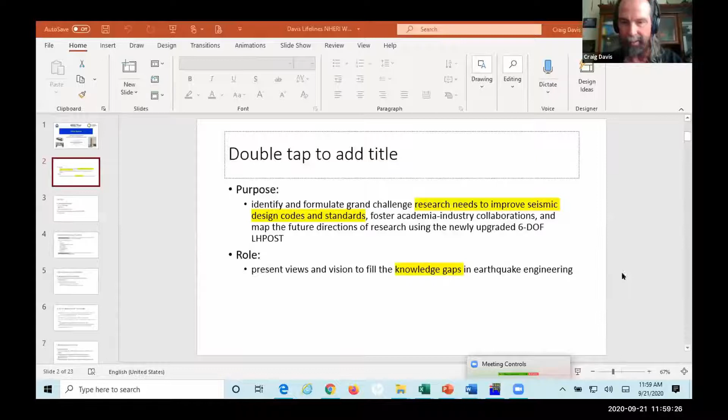Excuse me, Craig, excuse me to interrupt you. In case you are showing a slide right now, we don't see it. Oh, no. Are you still on the very first slide? No, we don't see any slide. Did you double click on share screen? I did. I'm sorry, I should have asked. Okay, I think it's coming. All right. Well, you've missed half my presentation. That's all right. Not quite that. You may want to put it in presentation mode, Craig. I'm so sorry. Yeah, it's tricky. I apologize for that. But now it's back out. We don't see it again. Let's see, try to do it.

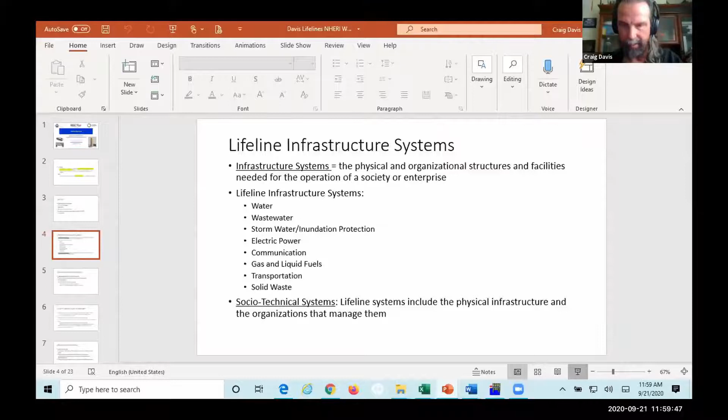And if you just click the presentation mode now. Yeah, the problem was my, there we go. Yeah, there you go. Good. Yeah, great. The internet stuff was in the way. Okay.

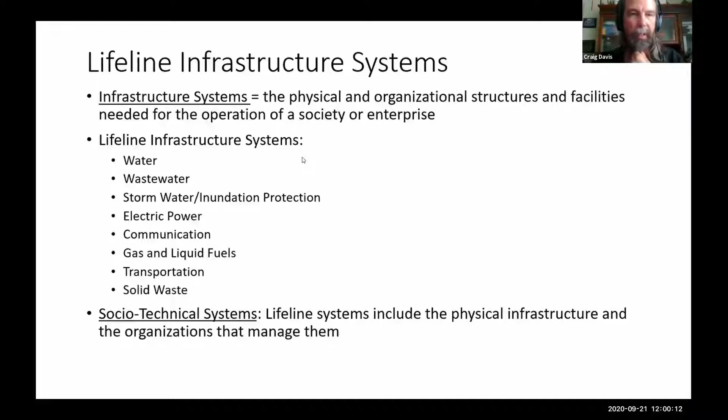So most of that verbal stuff had some language to go with it that you could look at on your own if you wanted to understand better. So what I was leaving with were these. So I just explained what Lifeline Systems are here, and I have them listed in the socio-technical systems. And I was going over this slide here, where there are numerous interlinked specialized components. They're interdependent, and they consist of a variety of subsystems.

So even though I was explaining the components, like dams or certain structural systems like bridges or buildings, in my language that I'll be describing here they are listed as components. There are also these components that make up subsystems. So as an example, if you have a water system, subsystems will be the supply, treatment, transmission, and distribution. Again, all of which could contain these components, right?

So in a water system, a tank or reservoir is a component of one of the subsystems. A treatment plant, which is a massive system unto itself, is a component of the treatment subsystem, and so on for transportation and all of the other systems. They all have a variety of subsystems, and these subsystems all have separate owners and operators.

So, for example, one company might own an oil refinery. Another company might own the oil and gas extraction facilities, and different companies would own the pipes or the transport systems to move this to the refinery. Then somebody else might own a different set of systems to move the refined products to places of distribution and so on. So all of these have to coordinate and work together, even in a disaster, or you don't get the services that you need.

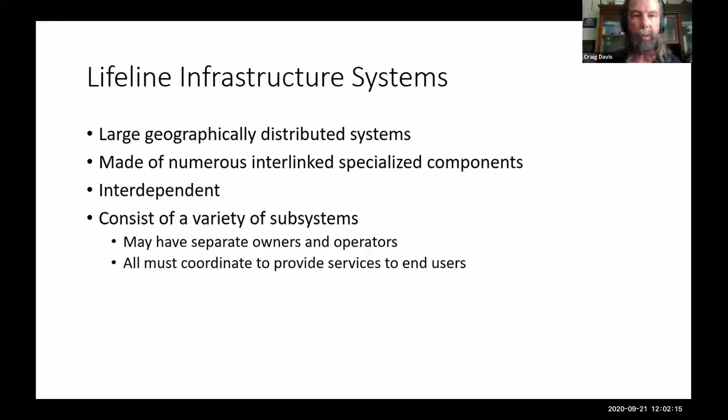So these are complications of Lifeline infrastructure systems that either don't exist in the other types of components or systems that we've been talking about, or they're scaled up to be much more dramatic. So we have to keep that in mind when we're talking about Lifeline systems. There we go. Okay. So some current system challenges.

There are limited codes and standards governing seismic design of Lifeline systems. Some of these are well developed, like we just saw in bridges and in buildings. And some are completely non-existent in other systems or for the components, right? And even though we have bridge design well developed in many areas, the seismic design of the transportation system as a whole, the whole highway system, is not well developed to be resilient, for example.

I don't know if there's actually a seismic design code or standard for how the entire highway system is supposed to perform. As an example, there's inconsistent approaches and criteria within a single system, and especially across systems. So in water systems, you've got tank design, you've got pipe design, but these different standards are not necessarily linked up to the same performance objectives.

As an example of what that means, there's a wide range of regulations. So for some components or systems as a whole, there will be limited to no regulations. And in others, just for certain components, you might have multi-jurisdictional regulations. Like in California, for dams, there would be FERC and the California Division of Safety of Dams, both looking at the same structure, and highly regulated. So we have a wide range of those issues.

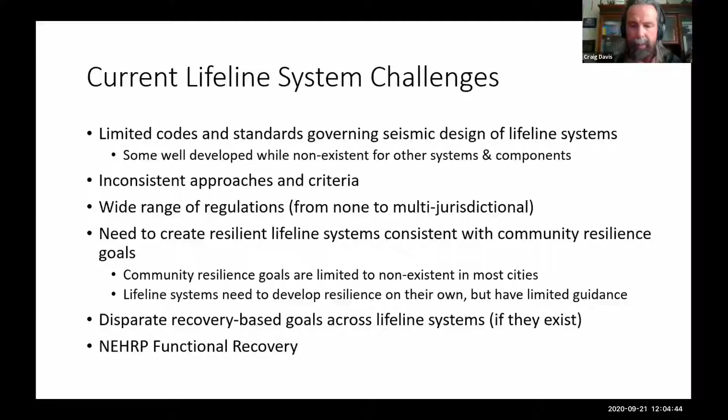And then the disparate recovery-based goals across Lifeline systems, if they exist at all. And then we have the NEHRP functional recovery, which is part of the reauthorization, and she brought up functional recovery and gave an example of some of that in her presentation earlier. So then let's get a little bit more into Lifeline system resilience.

It's multidimensional. There's lots of dimensions, but I'm going to give you just an example of very commonly understood ones for resilience: robustness, redundancy, rapidity, and resourcefulness. These have been referenced in some of the earlier presentations as well. And thinking about physical testing, I thought about, well, what is it that we're looking at? So remember, we're talking about resilience of a whole system, not a component. And so robustness of the components is usually what we're talking about for physical testing, or some of the combinations of components and how they interlink.

Sometimes we're talking about redundancy. So redundancy in the bridge system was just brought up quite well. But when you're talking about a system as a whole, you might be talking about two parallel transmission lines coming from two different sources of power generation. Right? That's also a redundancy. And so it's not redundancy within the same components, but redundancy within the system as a whole.

And we may include some aspects of rapidity and resourcefulness, but without all of these, you can't have a resilient system. So physical testing is important, very, very important, but insufficient to create a resilient Lifeline system, right? Because we have to have all of these other things. So I just wanted to have everybody keep that in mind.

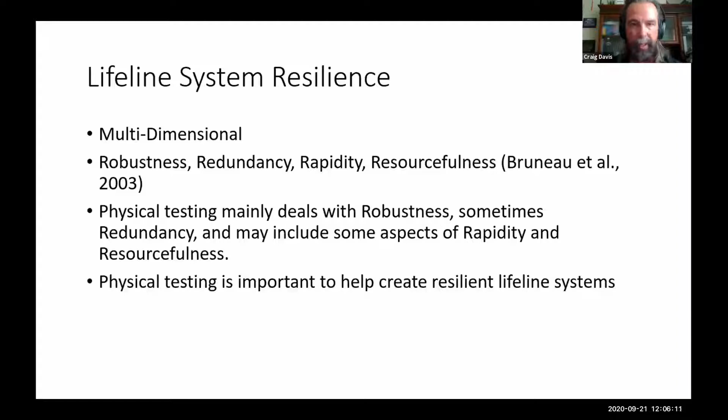And so now some current momentum in Lifeline earthquake engineering. There's a big push and developments for a framework for recovery-based objectives that will be consistent across all Lifeline systems and buildings as well, buildings and systems, to develop and improve existing codes, standards, and guidelines. So I separate here develop, because I mentioned that some don't exist, and improve existing, right?

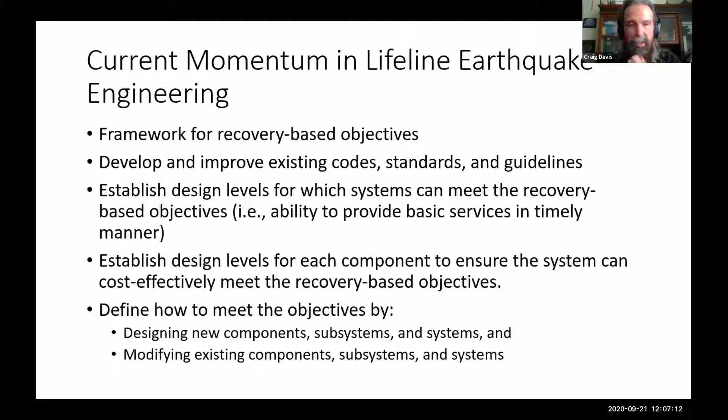And all of these have to be done consistent with the framework, which is why the framework is bullet number one. Then establish design levels so that systems can meet the recovery-based objectives. Establish the design levels for each component to ensure the system meets them, right? So that fourth bullet is to support the third bullet, because resilience is a systems level concept. And then define how to meet the objectives by designing new components, subsystems, and systems, and modifying the existing component subsystems. Right, so these are some of the things being worked on.

So now what I'm going to do is go through some research needs. And I'm going to talk about it at the Lifeline system level and some key components to give examples. I'm not going to be able to talk about all of the different Lifeline systems and all the different components, and I'm not intending to. I'm not going to talk about all of the different types of materials that can be researched, all the different types of structural systems that could be used, or the geotechnical systems that could be used to improve the Lifeline systems and their resilience, and all of that's implied, right? So I'm talking about it at a higher level.

So when I'm talking about pipelines, for example, there's a wide variety of pipelines, and new materials can be made, and all of those can be embedded into these research concepts that I'm bringing forward. So keep in mind the level that I'm talking about, and use your imagination as we go forward, and understand that this is just to give some ideas. There's no way I could talk about all the different types of things that need to be done for all of these different systems that are made up of all these different unique components, right?

So research on specialized equipment. Here, I'm just going to give some examples. Wind turbines, which have already been tested, but wind turbines tested in multi-directional shaking. It's going to be a huge difference. So I should have probably given an example of the Los Angeles Reservoir outlet tower, which was about 80 feet high, shaken by near-source pulses in the 1994 Northridge earthquake. A recording on that showed that it circled with 1G shaking 10 times.

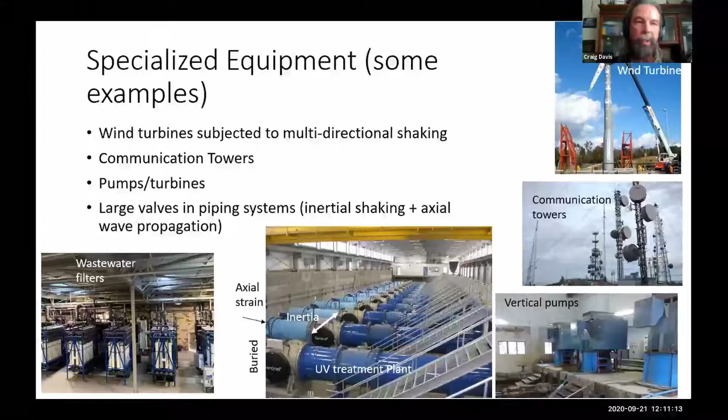So think of also traffic control towers at an airport, right? A very large type of structure that you could analyze. So Lifeline Systems are made up of these components of above and below ground specialized things that all have to work intimately together. And just a wide variety of different types of things that are affected.

Then there's the interaction of multi-system components. So think of this large table as an opportunity to put multiple portions of a subsystem together. So you saw actually there was an example that Joel pointed out from a power cable on a few poles, right? So that would be a small portion of these examples that I'm showing on the right of this diagram.

But then there's brittle insulators, and then you could use different materials to create flexibility on that. And there's rigid connections, and there's how much sag you put in the cable lines, and all of this moving in 3 dimensions makes a big difference on how these systems perform. So with this table, you can either use full scale or maybe scale them down and put multiple components and how they actually interact, because they're all interconnected in Lifeline Systems.

They're not individual buildings that could just sway and hit each other if they're too close, but you would walk in between them, or maybe you have a bridge. But all of these systems are connected together. So also think of the complications of an oil refinery, right? Again, one component, just like a substation, but it's made up of all these intricate components. And look at these big towers and things that are interconnected. Very unique structures, but really, really important to Lifeline Systems.

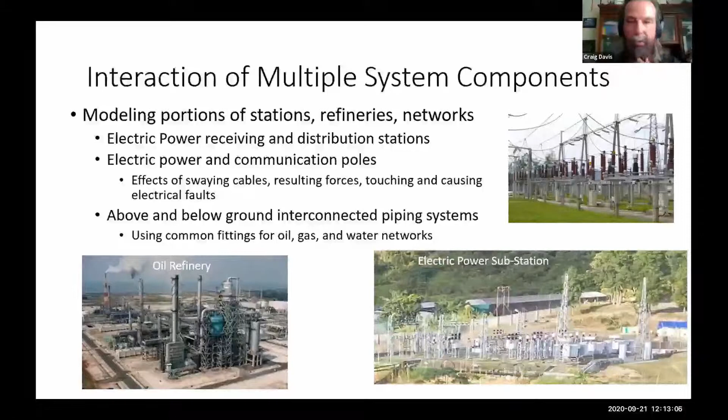Think of the underground piping in water, oil, wastewater, natural gas systems, and how that might be analyzed when it's affected by liquefaction. I'll get back to some of that in future slides here. But just to give some ideas on the importance of looking at the subsystem. Then there's the interaction of multiple system components, including both shaking and differential movement. And these differential movements might be ever so slight, but I'll give you some examples here in this slide of how important it could be using some rigid electric power connections.

So here's an example from Lushan, China, from the 2013 earthquake that I investigated. And what we have is an electric power substation being supported on one side by a gravity retaining structure. And then above that, you have just a vertical wall that was unreinforced and it fell over. That's not the point that I'm talking about. You do see that on the lower left structure. What I'm talking about on the lower left picture is the gravity retaining structure that's down below. It's quite high, maybe 15 feet high. And then it's supporting a portion of this electric substation.

On the right, what we see is near the margin of what happened where the ground cracking occurred because the gravity retaining structure had moved. We see ground cracks. They moved anywhere from just fractions of inches to accumulation of maybe 6 inches. But if you take a look at the equipment that's in the lower right image, you see that there's damage in some of these flexible and rigid connections. So some of these were actually flexible, but not flexible enough.

Well, I don't know that any of the codes or standards for electric power, and I could be wrong, I'm not an electric power expert, but I have asked around, how much do they actually account for permanent ground movement? And so now we have multiple issues that should be tested with shaking, as well as when permanent ground movement occurs. Or if the shaking's not at damage, then maybe even small amounts of permanent ground deformation should be accounted for. So as one idea.

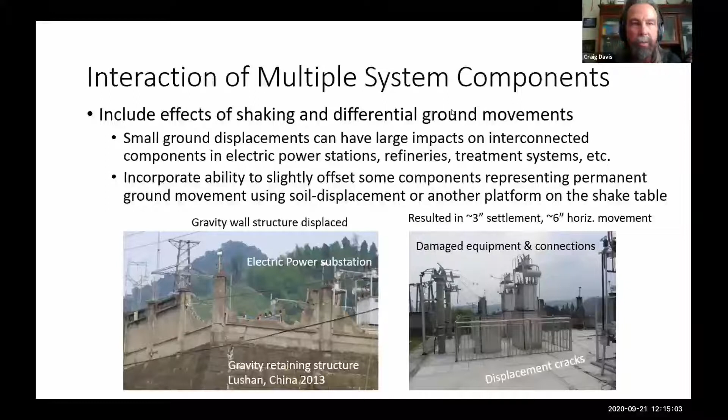Now, Joel assures me that this equipment could actually be used for fault rupture. So I just threw out some ideas of some potential near full-scale or full-scale testing that might be used. One of those might be to confirm tests on underground piping that have been done at the Cornell box that they show an image of in the upper right.

They've done a tremendous amount of work on pipelines, maybe between 6 and 12 inches in diameter, but a lot of the lifeline underground systems go much larger than that. And so on this test bed, you might be able to confirm or disconfirm the behavior of larger diameter pipes compared to the smaller diameter pipes.

And then put that in a numerical modeling method so that we don't have to test all pipes and all the different types of liners and materials and jointing connections that can go with that, right? There's a whole bunch of stuff that can be done on large diameter that so far has not been able to be validated because we can only test the smaller diameter. But that would be a tremendous help.

Then the behavior of co-located lifelines. So I show an example of lifelines crossing the San Andreas Fault. So here, with this large test bed, you can quasi-statically move a fault rupture, but you could actually look at the interaction of multiple closely spaced underground structures and how they affect each other. That I don't believe has ever been done before.

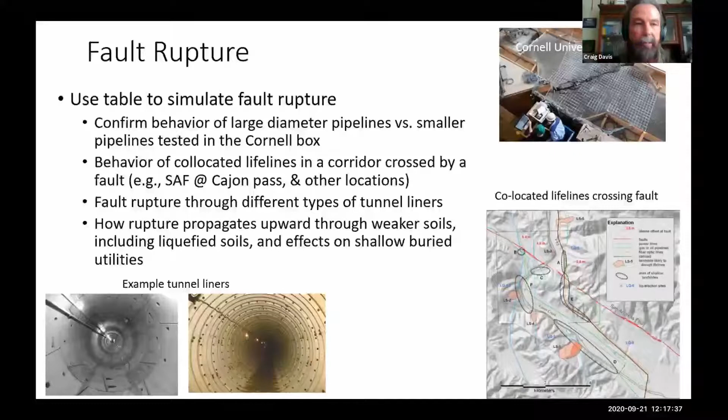Then there's an idea that in the lifeline industry, margins of landslides are assumed to behave similar to a fault rupture. So if you have a strike slip fault, that's kind of the vision of the way we look at margins of landslides. But a landslide actually has 2 margins, right? So the width of this landslide is really important. We really don't understand how this interacts with the stresses and strains in buried structures, right?

So especially when we're looking at pipes moving across a landslide or cables or any type of buried structure transversely, longitudinally, or especially obliquely, right? These types of things maybe could be tested in a test box that could simulate landslide movement. Or if you could do 2 shear movements, like 2 fault ruptures at once, I don't know. But just some ideas. I don't know if you could accommodate this, but some things that would be really helpful. And to confirm if this concept that you could just use the fault rupture as a margin of a landslide and simulate things this way.

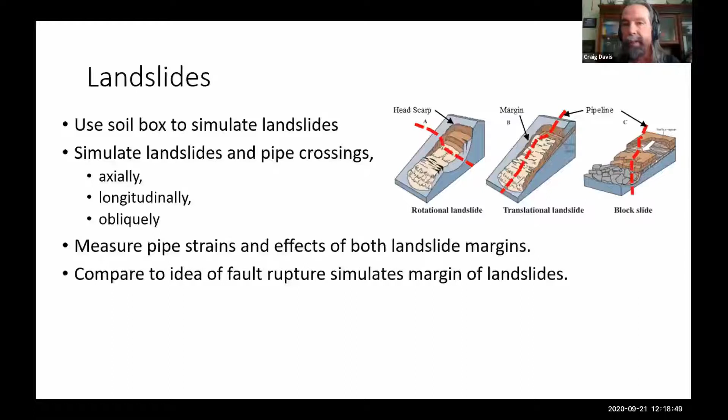That's not been investigated. I don't know if you could use this larger set of testing equipment to simulate a lateral spread and the margins of that lateral spread and how it affects an entire network scaled to some level. You might actually be able to use full scale if you use 2 to 4 inch diameter pipe.

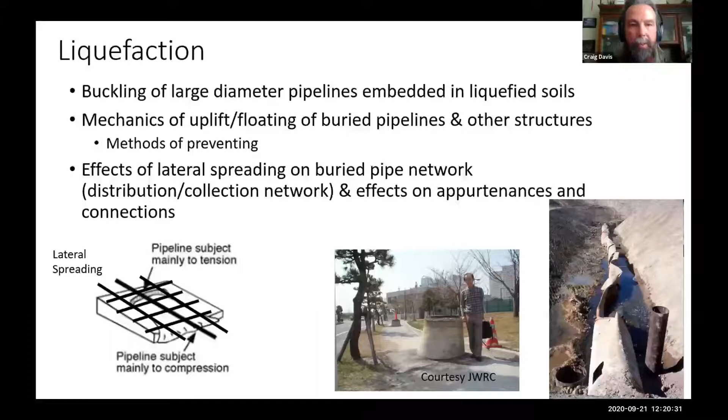I don't know, but just an idea that you might be able to undertake. Wave propagation. So Joel was talking about the rocking motion. He had mentioned that to me a few weeks ago, which brought up a thought in my head.

I don't know if you can simulate Rayleigh waves on this machine, but that would be pretty awesome if you could, because there's a need for better understanding the strains in the ground caused by Rayleigh waves, surface waves, and how that strain propagates into pipelines so that we could better understand the design of buried pipelines subjected to surface waves. So I'll throw that challenge out to you. I don't know if that's possible.

I'll also, on this next bullet, show an image in the next slide. So lifelines a lot of times come up with long linear lines, usually pipelines, but you've got long cables, you've got very long structures and such. So I don't know if this table can simulate differential movement at each support, but I thought about that over the past few days, and I think you could.

So we have multi-supported pipelines or other types of cables and so on. And we need to investigate the behavior of the different types of support. So think of a bridge, right? We just saw long span bridges with multiple supports, but these things go miles and miles and miles. So we need to understand how these structures are affected by how a wave propagates through them.

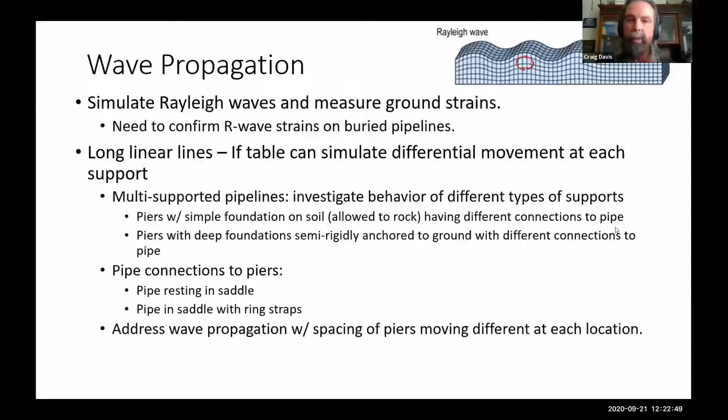So we need to address how these different connections affect the behavior of the structure and how a wave propagating through there changes all of this, right? So let me give you an example of this in an image. So in the major part of this picture, what I'm showing is the Los Angeles Aqueduct in the north end of the San Fernando Valley.

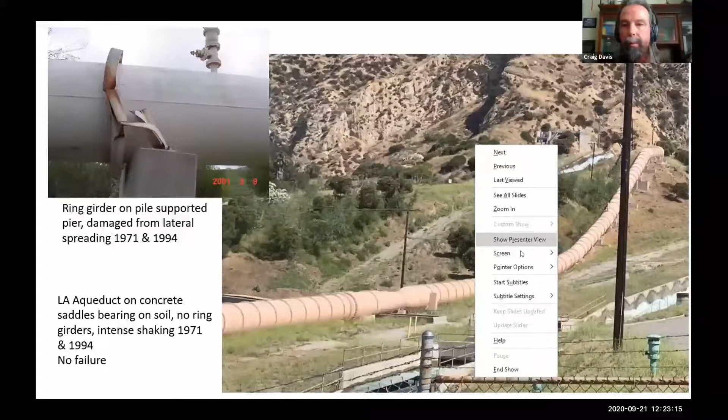It was severely shaken by, at the time, both times, record-breaking ground motions from the 1971 and the 1994 Northridge earthquake, but never damaged. But what you see here is, I don't know if I could put the, I don't know how. There we go, you can put a laser. So we have saddle supports here.

So think of a concrete pier that's going about a quarter of the diameter. It's curved, and it's cast in place, curved. It's just sitting on the ground with just bearing on the ground. And so this pipe is just sitting on it. It's not rigidly connected. It's just sitting on this concrete pier, right? You just see them up in here. I probably should have blown up a picture for you to take a look at that.

But with very large accelerations, reaching or exceeding 1 G, very large displacements reaching or exceeding 1 meter or 3 feet, and very large velocities reaching 180 or greater centimeters per second, this pipe was not damaged in 2 earthquakes. But yet, structural engineers want to come in and make these rigid connections, deep foundations, replacing these piers with piers on piles and putting rigid straps around the outside.

So it would be really important to understand, how does this pipe actually rock as it's sitting in this pier, because it's not connected? How does this pier actually rock on the ground, right? It's not rigidly anchored into the ground. And then how do those different motions change? And we have this long structure with each pier rocking differently, and it's torsionally moving, right?

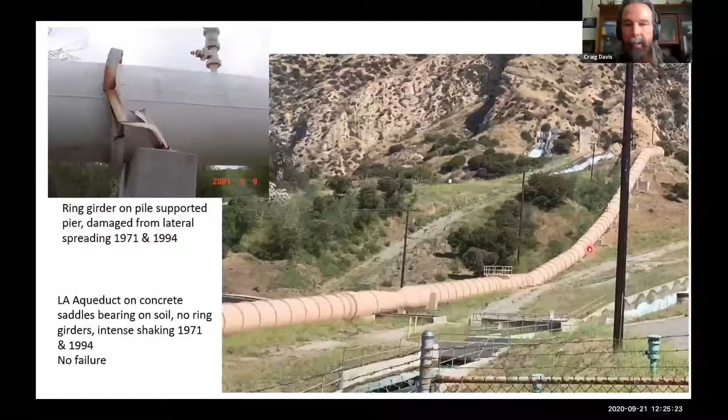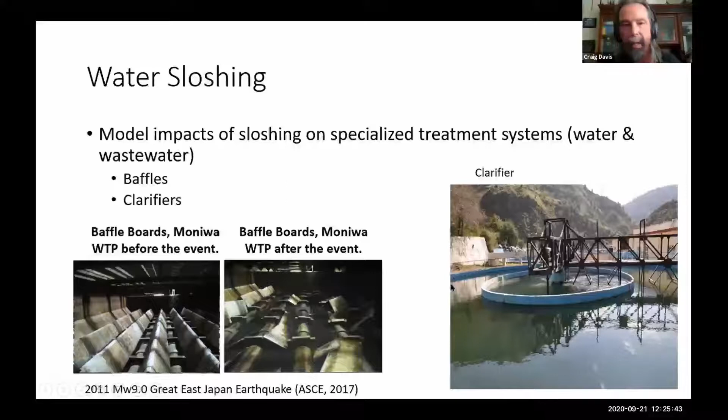And then we have water sloshing, right? So we have treatment plants with different tanks of water, and I'm showing some examples. I don't know if you could put a water tank and simulate some of these things, but we have sensitive structures that could be affected by water sloshing, baffles, clarifiers, and so on.

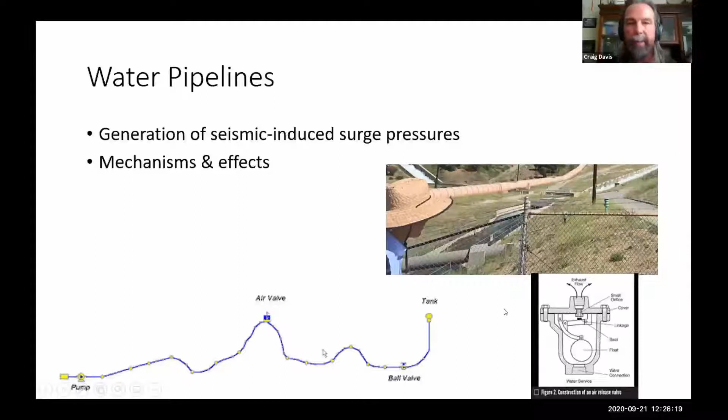The top behaves as a diaphragm, the bottom behaves as a foundation of some kind. There are deflections in there just from the diaphragm. They have varying dimensions of height, length, and width. So you have very rigid shear walls in the lateral direction. The shear walls don't move very much, but if this is a very long span, you're going to get the middle moving a lot, right? So that's the displacement of the diaphragm.

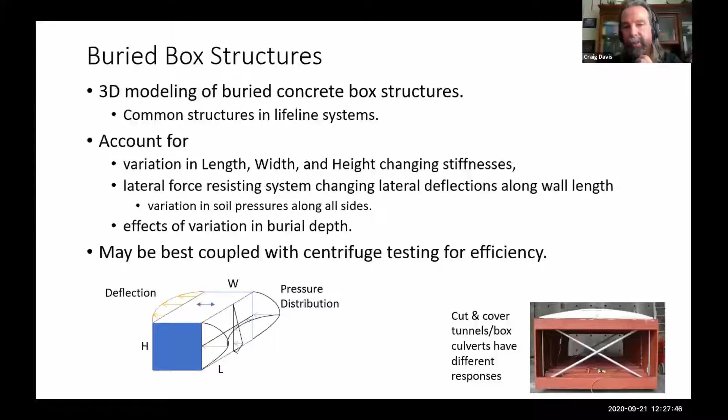But as we know, soil pressure on a wall is a function of the displacement of that wall. So we get varying deflections and varying pressures along these structures that are not well understood. And are we properly designing these, would be my question based on this basic concept. These are questions that come around in the industry.

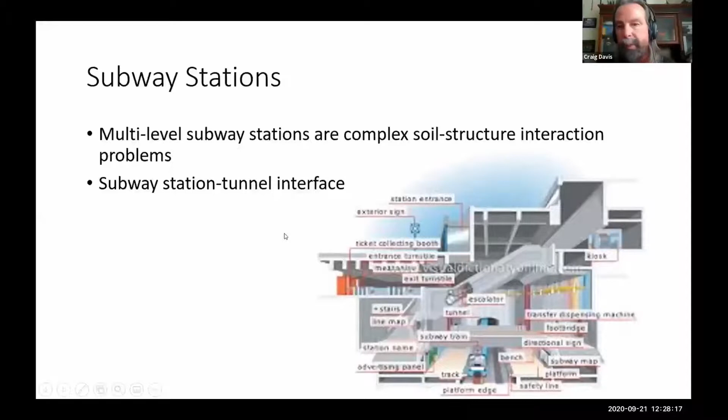Then we have really complicated underground structures. I just show an example from the internet of how complicated these subway stations might be. Think of the things that John van de Lindt presented for above ground multi-story structures. Now put that underground with escalators and elevators and stairways and multiple levels, sometimes 3, 4, 5 levels in some of these subway stations. So they can get very, very complicated, and these aren't well investigated and maybe could be tested.

So in conclusion, I'd like to remind you that Lifelines are very large, complicated systems made of numerous specialized components. There are limited code standards and guidelines dictating their seismic design. There is a need to create and improve standards incorporating recovery-based design consistently across all Lifeline systems. Several potential research ideas have been presented, but I think I'm just barely touching the surface.

Hopefully, I've sparked some imagination for people to utilize throughout all of these Lifeline systems and specialized components. As experts in testing, you can come up with ways to utilize these advanced testing machines that you have to improve the performance of Lifeline systems into the future.

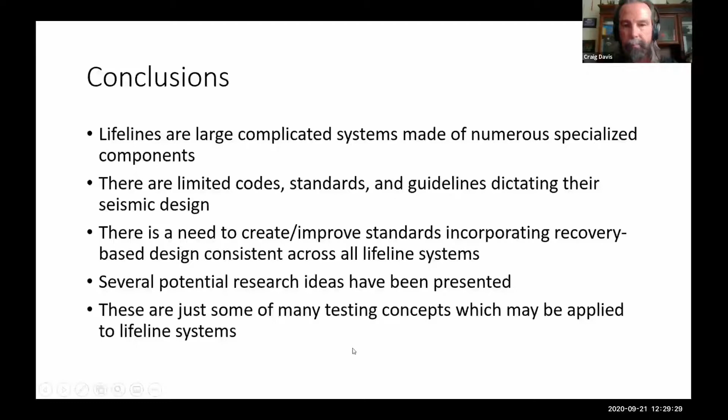I'll read it out. What about nonlinear numerical modeling considering SSI and asynchronous motion? The size makes the problem very complicated. How do you address it? It should be incorporated, first of all, because things behave nonlinearly. The question makes me think of my example of the long linear structures, and the numerical modeling of that can begin to give you ideas, but I think the problem, even though it might seem simple, is much more complicated than what you're going to be able to envision and imagine in just a numerical model.

So my suggestion would be to incorporate that with testing. So good numerical modeling in research and in practice, with testing that uses practical aspects of what is actually incorporated in the field, similar to the way good ideas on this were described in earlier presentations. The coupling of that is what I think we need. So hopefully I'm answering your question.